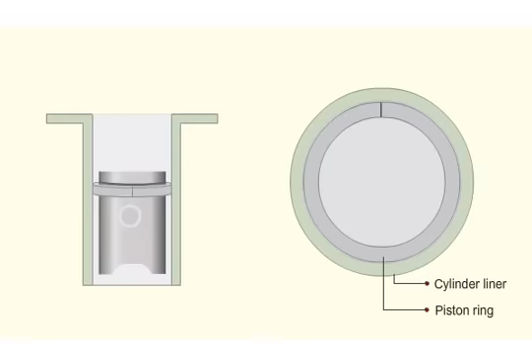This increases the friction, resulting in breakage of ring and seizure of piston. If the clearance is greater than the maximum limit, combustion gases blow by the rings and exhaust gases enter the crankcase. This results in loss of compression pressure in the cylinder.

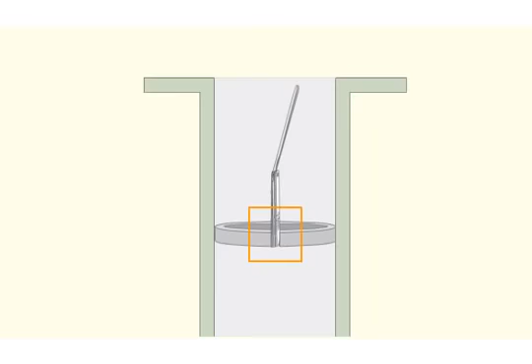To measure butt clearance, insert the rings in the bottom of the liner and ensure that they are in line with the liner axis. Measure the clearance between the faces of the piston ring using a feeler gauge. Record 2 sets of readings, forward, aft, and port starboard.

Axial clearance is the clearance from the top of the ring to the top of ring groove. The combustion gases exert pressure behind the piston rings and push towards the liner for proper sealing. If the clearance is less than the minimum limit, combustion gases cannot flow behind the rings.

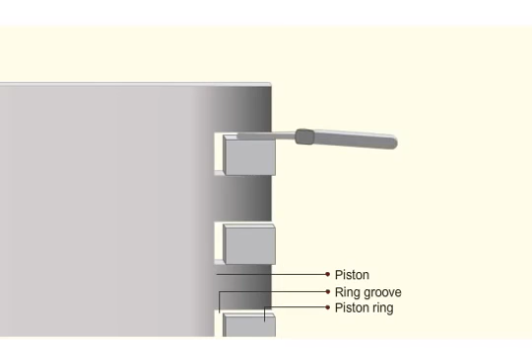To measure axial clearance, fit the ring in the respective groove such that it rests on the lower surface of the groove. Measure the clearance between piston ring and upper surface of the groove using a feeler gauge. Record 2 sets of readings, forward, aft, and port starboard.

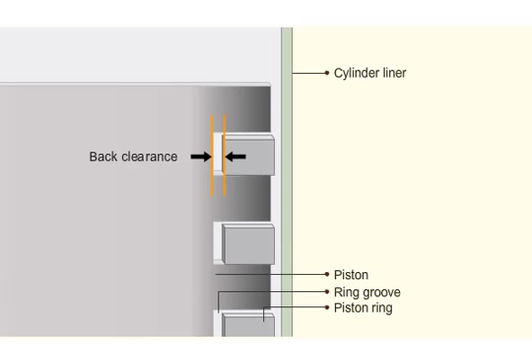Back clearance is the clearance from inner diameter of the piston ring to inside diameter of the groove. Thickness of the ring should be less than the groove depth, so that the outer ring face is inside the ring groove. If there is no back clearance, the rings take the side thrust. This results in high friction and possible piston seizure.

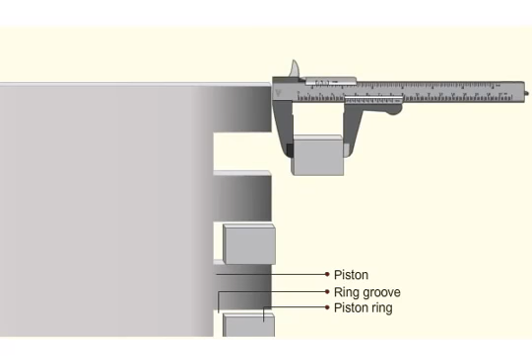To measure back clearance, measure the depth of the piston ring groove by means of the depth gauge. Use a vernier caliper to measure the thickness of the ring. Take both these measurements in at least 6 different positions around the groove circumference. The difference between the two readings will give the back clearance. If the back clearance is more than the specified limit, replace the rings.